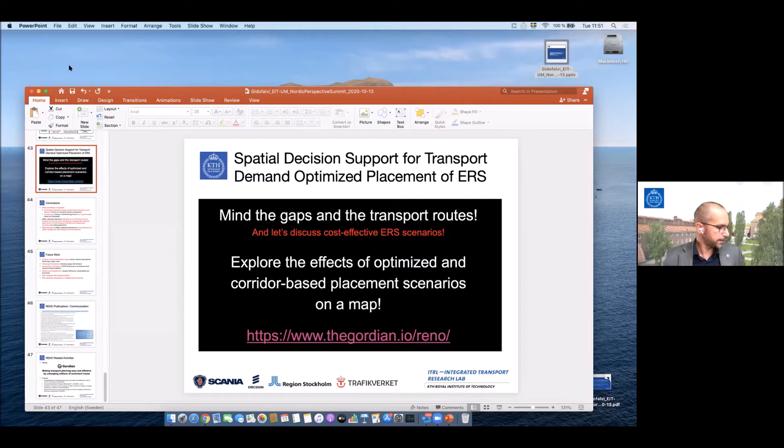Oh, thank you very much. Can you see my screen? Yes, we can. And you can see my presentation? Yes. Great. Okay, thank you very much.

My name is Håkan Sundelin. I'm the regional director of ElectReon and also the project manager of Smart Road Gotland. I've also been working with electric roads for about 10 years now. Basically, this installation on Gotland is my third electric road project. I've been working with wireless and also overhead lines previously during my time at Scania, and also been the research or project leader of the electric road collaboration between Sweden and Germany. But right now, I'm the project manager of Smart Road Gotland. I will tell you more about our technology.

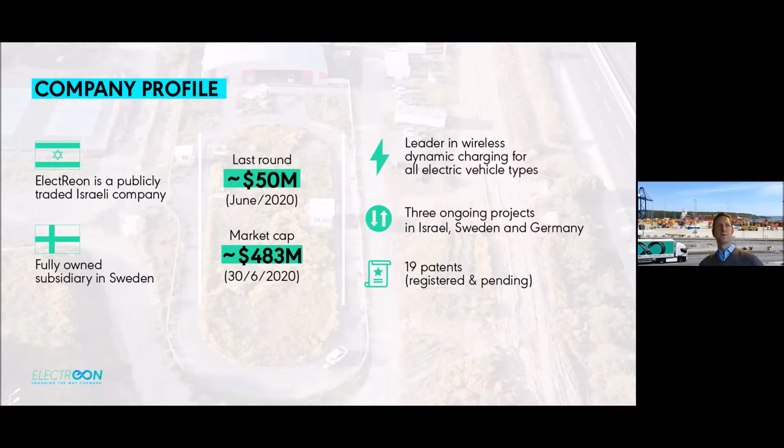ElectReon is an Israeli company. I'm in charge of the Swedish subsidiary, which is fully owned by ElectReon in Israel, which is also publicly traded on the Tel Aviv stock market. We are only focusing on wireless charging and the technology for both the vehicles and the infrastructure.

I think I have to thank the previous speaker for the good introduction to ERS, so I will skip everything about why we're talking about ERS, but just to mention some, and this has been discussed earlier as well: the challenge in our view is the batteries. If we want to transport long-haul trucks especially, but also passenger cars, we will need a huge amount of batteries, especially if we're going to reduce fossil fuel emissions.

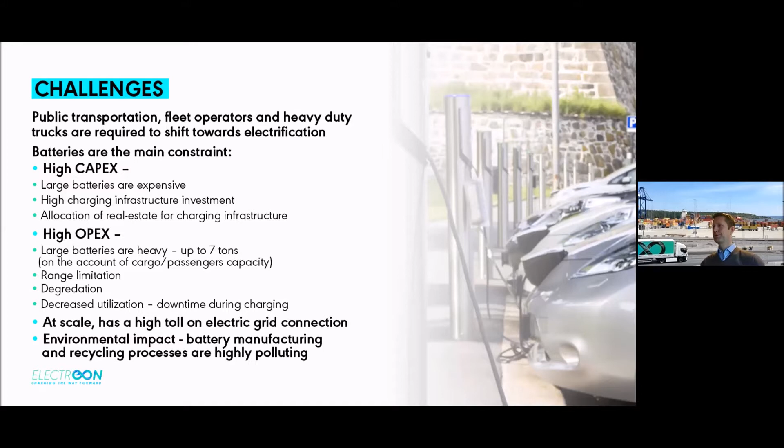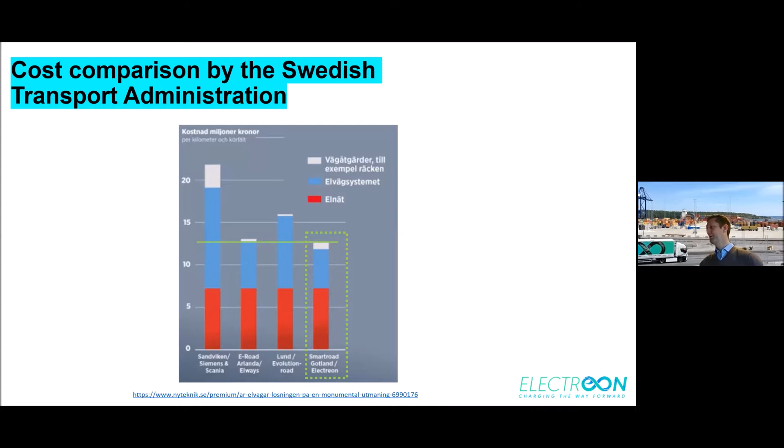So why do we believe in electric roads? I mentioned the battery, the size and weight of it, but also what's often forgotten is that if we're really going to go completely fossil-free, we need to electrify the passenger cars as well, and that is actually a much larger impact on the total environment, because that will need a huge amount of batteries. Even if heavy-duty vehicles make up a third of emissions in Sweden, electrifying passenger cars will need, I think, 70% of the total amount of all batteries that we would need.

So how do we lower that number? We see electric roads as a solution. So why wireless then? Mainly that we are creating a shared infrastructure that can be used by any type of vehicle.

After we have installed it, we have no visual impact. But of course, no one pays us for having that - it's nice to look at, but that also has a large impact on road maintenance and also keeping the road clear, clearing the sides, since there's nothing to crash into. There's also easier installation.

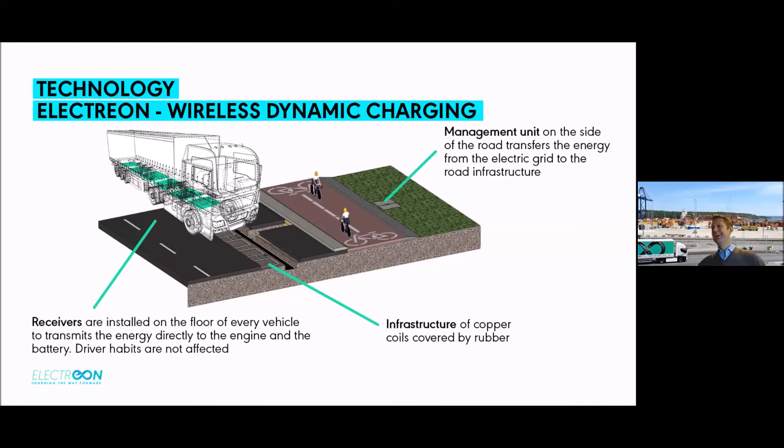Basically, it's technically an air transformer. So we have half of the transformer inside the ground and the other half on the top of the vehicle, or below the vehicle. And just to give you a view of what we can do - often we are talking about electric roads now, but we are not seeing electric roads as a single solution. We are doing all of it. So the same technology can also be used in static, or what we call semi-dynamic, or in dynamic mode, and for all different types of vehicles.

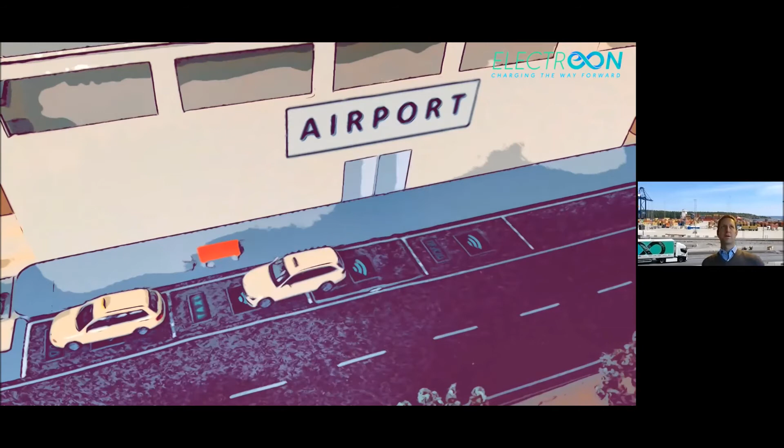So it's not a choice between electric roads and static. It's rather, of course, when you are standing still loading and unloading, you should charge. You should not stand still just to charge. And this is especially true when we're going to a future with autonomous vehicles - then it becomes kind of ridiculous that you should have to stop a vehicle that's actually designed not to stop, just to charge.

What we include in the system is also a management system that meters exactly how much each vehicle is consuming, its location, and its state of charge. This allows us to provide orchestration of the fleets and improve things, because the challenge in the future will rather be the amount of energy needed at one location, so you need to optimize it.

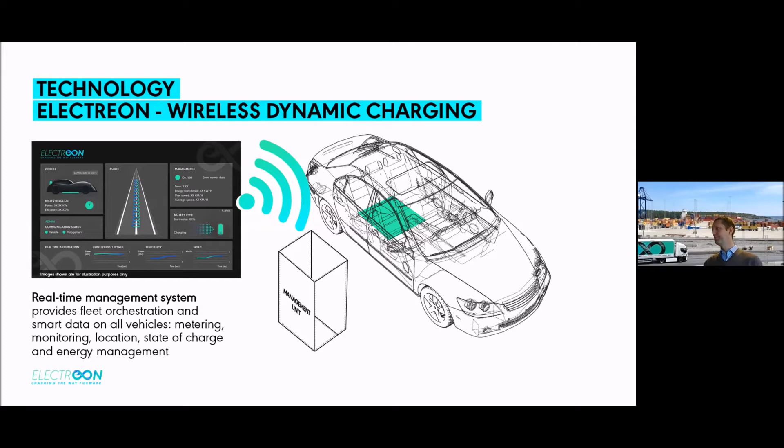What we also can do is have smart balancing of the grid sources, because we will have power shortages in the future as well, and therefore we need to be clever about how we divide that constrained resource in terms of energy. So in this case, when the passenger car or the bus has the lowest amount of energy, we could, if energy is constrained, prioritize charging that specific vehicle instead of the fully charged truck.

Our target, the use cases we are focusing on, are cities. Buses are, as you all know, the forerunner in electrification when it comes to commercial vehicles. Then there's point-to-point electrification of highways, ports, and industrial zones. And also, of course, autonomous vehicles, because basically autonomous commercial vehicles are looking at the same use case as we are.

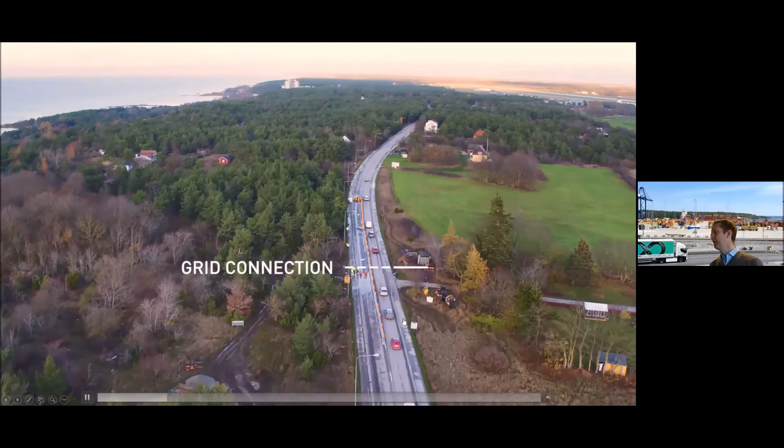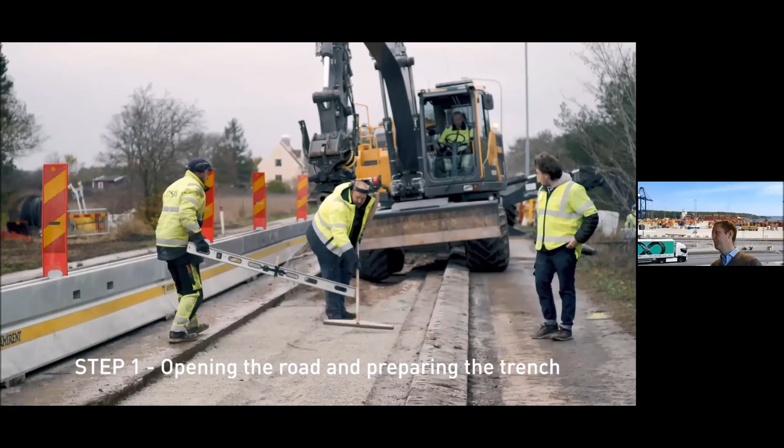Just to give you a preview of what we're doing, this was the installation done in November last year. To the right you see the grid connection, and then the actual road installation. What we do is open the road, mill it and prepare the trench, then place the coils and connect them to the management unit. After that's done, we repave the road, and then we are done.

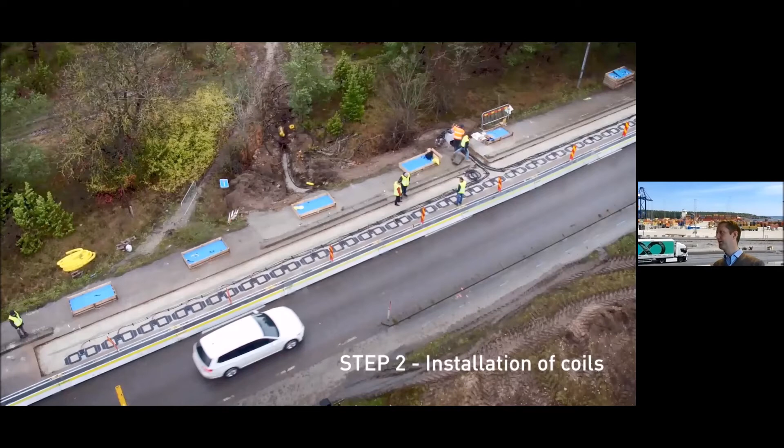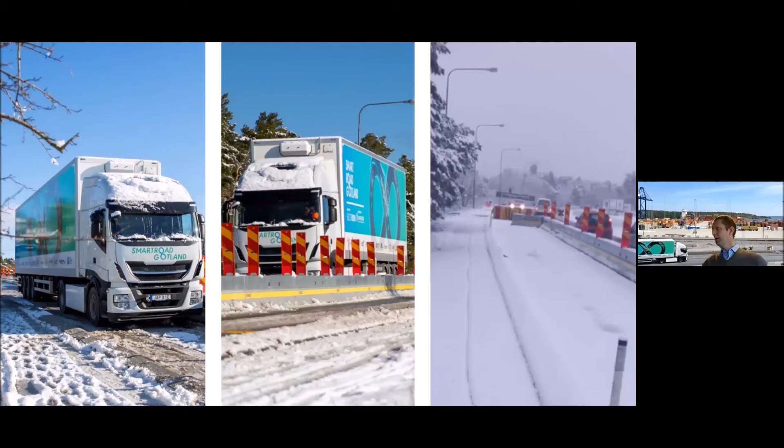This video here was from the very first installation, and since then we have tested the system, as I mentioned, in February. We were lucky - Gotland is not the obvious place for heavy snow, but we actually got some snow, which really isn't an issue.

Sometimes I get the question, will the system work with snow and ice? Technically it's a bit of a strange question because it's a magnetic field - it doesn't have interference with water, snow, and ice, as long as you don't mix it with steel. So it worked, and it was good to be able to test it in winter conditions too.

For the next installation being done now, we are supplying the next section with an energy storage that we power partly by solar cells. This is mainly done to show that it can be done, because one of the questions we often get is that we have to wait to reinforce the grid in order to start electrifying the roads. But what we are trying to show is that you don't have to wait that long.

You can actually find an intermediate solution by using stationary charging or stationary storage. So this will be done on the section next to the ancient wall of Visby.

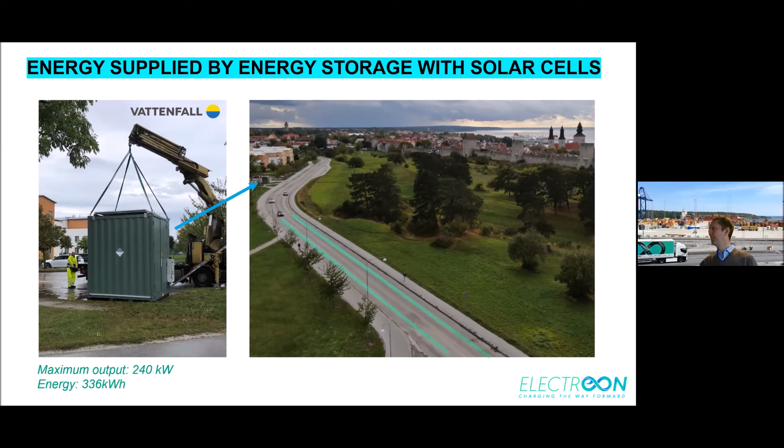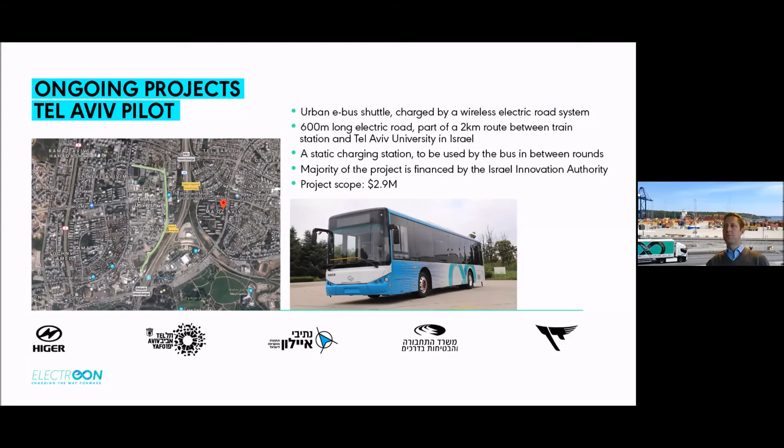The other ongoing project is in Tel Aviv, where we are installing a 600 meter installation, and there we will also have a bus running. We actually finalized that installation. It's very interesting to compare the two installation sites.

On Gotland, we can basically work 24/7. In Tel Aviv, which is a highly dense populated area in a real urban setting, we had to do it overnight. It was 30 degrees at night, which is not the case on Gotland right now when we're doing the same. But it was also an interesting test to see that we can actually speed up the installation that fast.

The next project is in Germany, where the large utility company EnBW has bought our technology to operate a bus line between their training center in Karlsruhe and the public train station. I think this is very important because it's a commercial contract, not funded by some external party, which means we've gone through all the discussion in order to move forward in terms of technology readiness and so on.

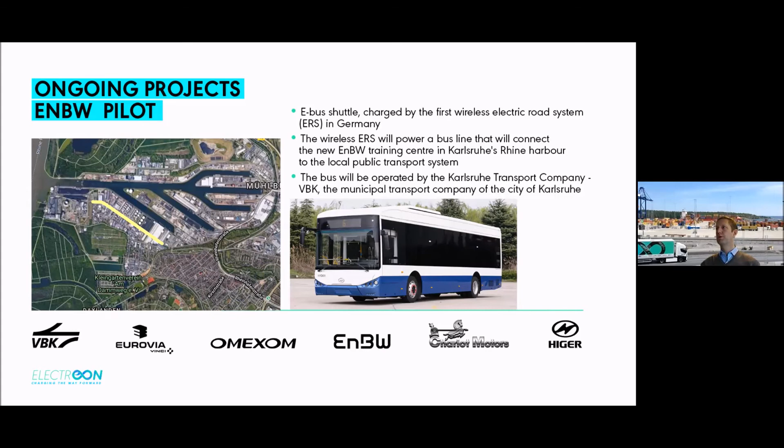We see a huge interest from many parts of the world. Just to mention some: we heard about the upcoming pilot in Sweden. There are ongoing discussions in Israel to build a bus line. We have quite large interest in Germany. There are also some quite long or serious discussions in Italy about a toll road, and California, of course, when it comes to clean transport, is also always an important player.

Since this is a Nordic conference, let me mention some details about the Swedish pilot. The Swedish Transport Administration has identified two different stretches: either Örebro-Hallsberg or Nynäshamn-Västerhaninge, two highway sections in different parts of Sweden, and they are now investigating which one to choose. The first step will be to pick the route, and then the next step will most likely be to make a procurement of the technology. This is an important next step for us to be a real competitor in this procurement.

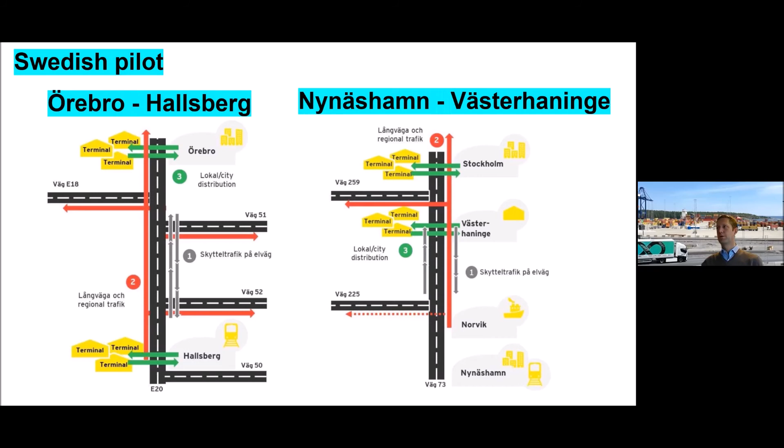And with that said, I would like to thank you and be happy to answer some questions.